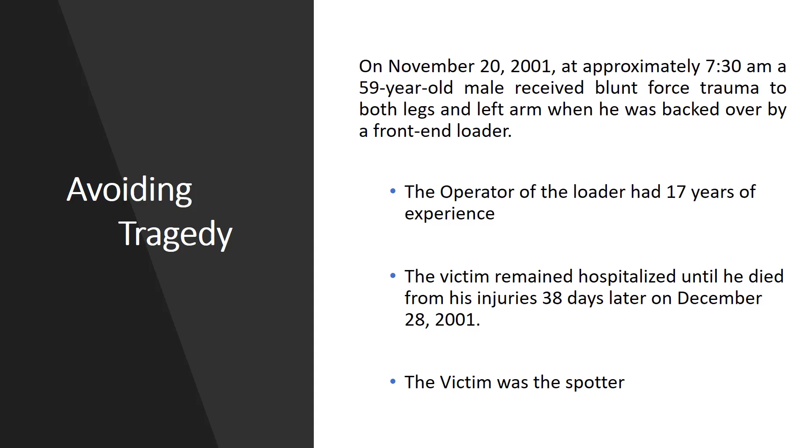The point of this slide is to ensure that the typical notion of assigning spotter duties to the newest or least experienced laborer is dangerous and irresponsible. Spotting equipment is a demeaning task? No, it's not. It's an important task that helps prevent accidents and fatalities. Spotters must be experienced and knowledgeable in order to maintain a safe working environment.

What is a spotter? Someone trained to monitor mobile equipment movement and maintain immediate lines of communication with the equipment operator. Possesses knowledge and experience with construction and/or the area. Understands typical hazards of specific construction mobile equipment and knows basic hand signals to both guide and communicate with the mobile equipment operators.

Where to use spotters? Spotters are required for the protection of workers, materials, structures, and equipment when a driver or operator does not have a full view of the intended path of travel. An operator is moving in an area where other workers and/or personnel are in the immediate vicinity. Maneuvering with limited visibility or space. In high traffic areas. Operating near overhead power lines. And when physical hazards are present.

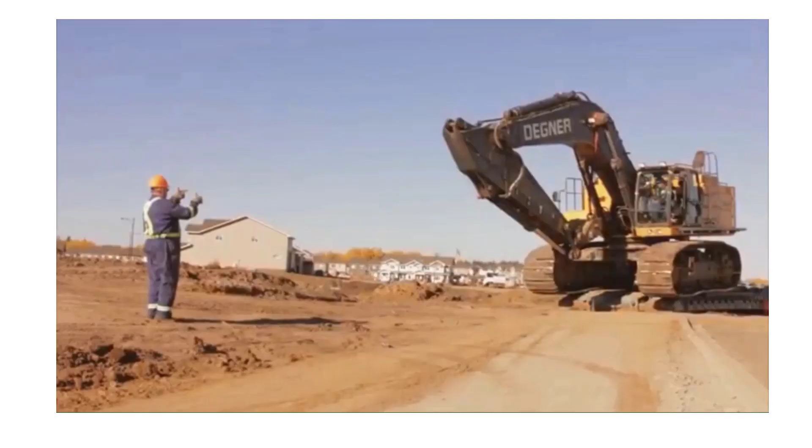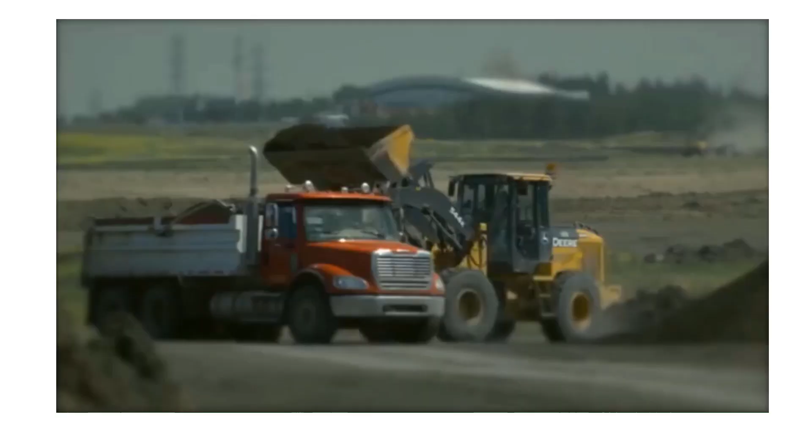So we have an understanding that the use of spotters is advantageous to the safe execution of work with heavy equipment. Are they used at all times? Not necessarily. But here are some common scenarios encountered on construction sites when spotters should be used. Spotters should be utilized when navigating with materials, working in tight or congested areas to assist in monitoring the operator's blind spots, working around overhead utilities or structures, excavating around buried facilities, and on sites congested with heavy traffic and/or ground personnel. While every construction site will present different scenarios, it's important to recognize the site-specific hazards and identify when the use of a spotter will help eliminate or control those hazards.

Spotter responsibilities. They shall be uniquely identified, protect themselves, dedicated to the task and have no other duties. Only task is to spot the equipment moving, prevent and reduce the potential for accidents and injuries, stay constantly aware of surroundings and changing conditions, prevention of equipment contact with personnel, machinery, property, and other equipment, maintain clear, effective communication with the equipment operator and all personnel in the immediate area.

So does just having a spotter make things safe? No, not really. A spotter contributes to a safe work site only if they are properly trained and understand their function. They must recognize the equipment requirements and limitations and be able to give clear direction to operators. Not everyone can be an effective spotter, and recognizing some of the requirements needed is essential in selecting the right person to do the job.

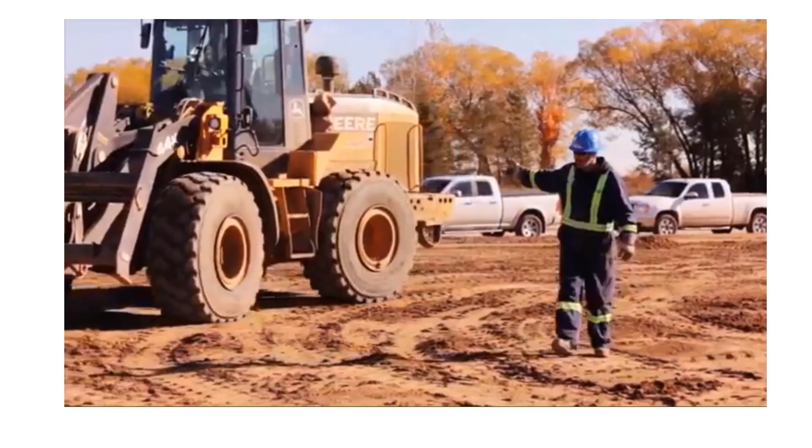A spotter needs to possess the following skills. Must have a strong understanding of the task, good vision and be able to judge distances with accuracy, clearly understand all communication protocols, including signals to be used to direct equipment operators, be fit for duty, including the strength and ability to stand for longer periods of time, and may need to be able to walk significant distances. They must remain diligent and alert in recognizing changing conditions and hazards.

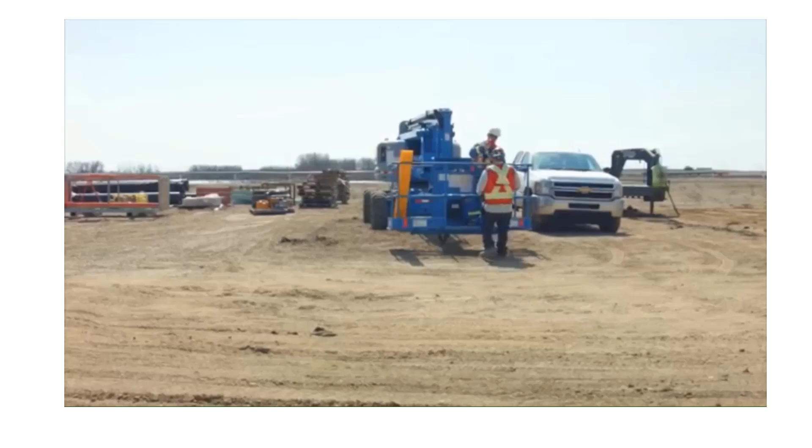Understand the need for and maintain the care and appropriate personal protective equipment needed for the job. Possess a responsible attitude in maintaining a safe work environment for themselves, the operator, and their worksite. Employers need to recognize these requirements, and workers tasked with spotting duties need to demonstrate these skills. The wrong person tasked to spot equipment can result in significant damage, injury, or even death.

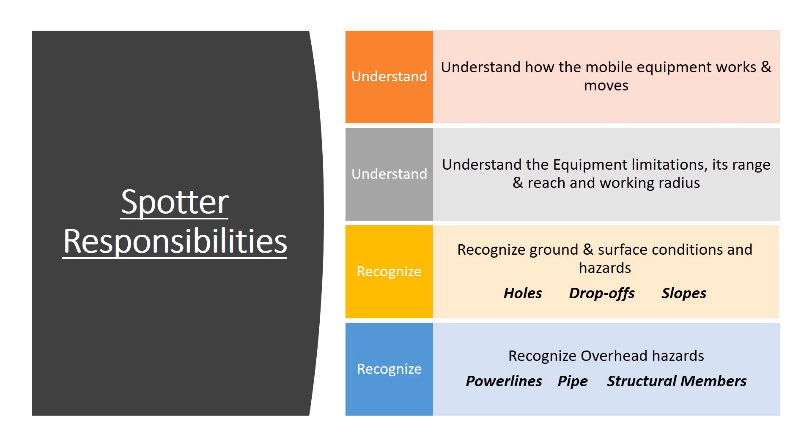Spotters must understand how the mobile equipment works and how it moves, understand the equipment limitations, its range, reach, and working radius, recognize ground and surface conditions and hazards such as holes, drop-offs, slopes, recognize overhead hazards such as pipelines, power lines, structural members.

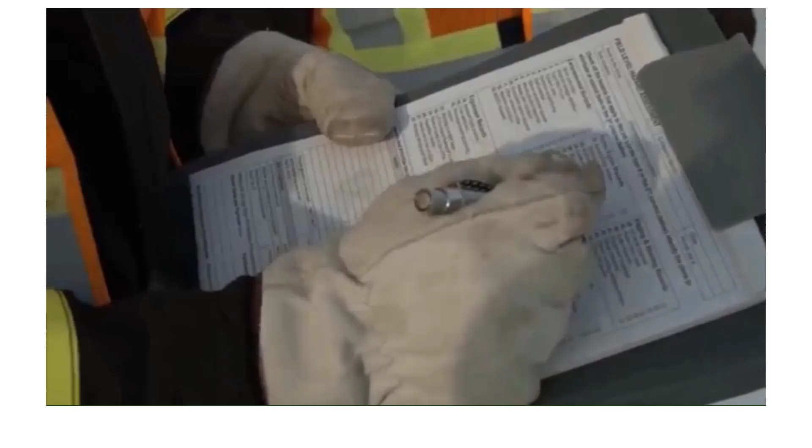We've identified the requirements and expectations needed of a suitable spotter. However, before any work can begin, a hazard assessment must be conducted. This process must include all personnel involved in the task at hand and is required to be reevaluated and updated as the task or day progresses. While every task and site will pose their own hazards, some general hazards to consider as it pertains to the spotter's role can be applicable in all operations.

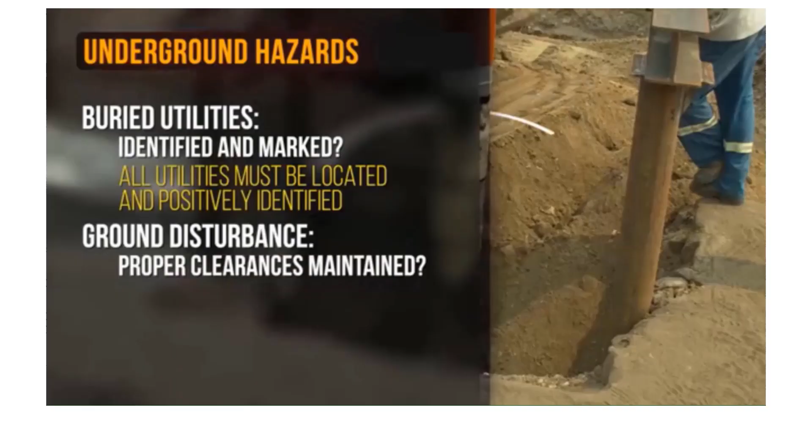Consider ground conditions. Is it smooth and dry, or is it slippery and uneven? Is there a slip or trip potential for the spotter? Do the ground conditions present a potential rollover concern for equipment? What about hazards above? Are there overhead power lines, structures, or work areas present where the spotter or equipment will be working? Are there buried utilities in the area, and have these been identified and marked? If spotting equipment during excavation work, all utilities must be located and positively identified. Are adequate ground disturbance clearances being maintained, and do you know what the clearances for mechanical excavation are?

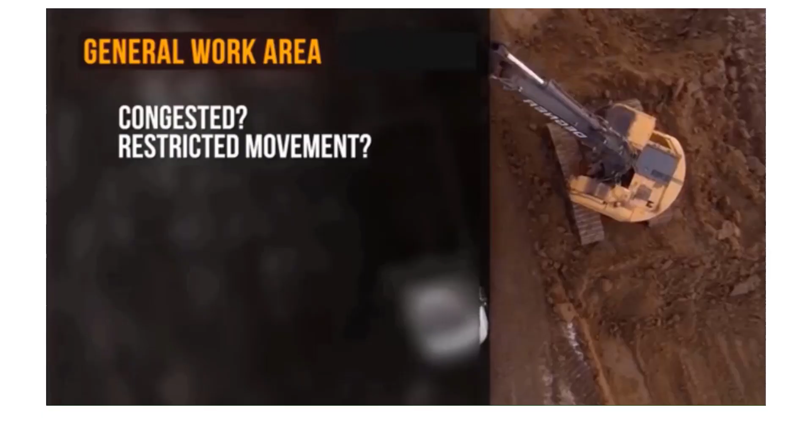Is the work area congested, or does it present restricted movement for the equipment? With pivoting equipment such as excavators, how much room does the equipment have to operate considering their swing radius? Are other workers in the area of the mobile equipment? What are the blind spots of the particular equipment, and what are the safe positions for the spotter to be to both direct the operator and stay clear of blind spots or pinch points? Is the spotter positioning safe in the event of operator error, mechanical failure, or equipment upset?

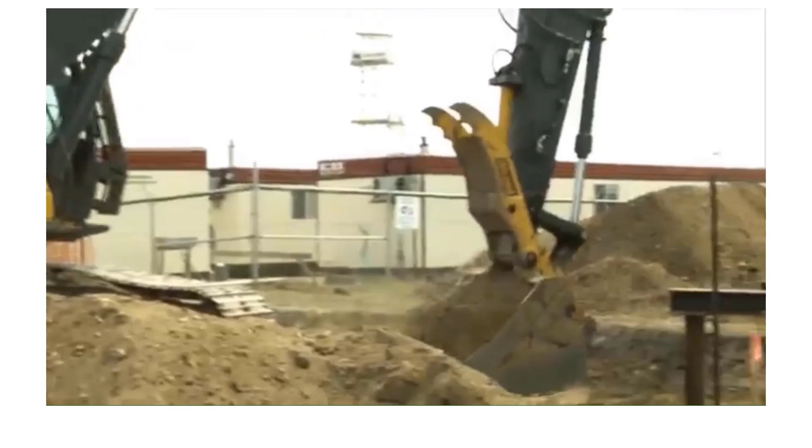Does everyone involved fully understand the communication protocols or signals to be used and the method of communication established? Are two-way radios to be used in combination with visual signals, or are the spotter and operator relying solely upon visual communication and signals? These are some of the most common and critical questions to consider when completing your hazard assessment. You will never control a hazard that you do not identify.

Blind spots and hazards. What is a blind spot? A blind spot is the area around a vehicle or piece of construction mobile equipment that is not visible to the operator, either by direct line of sight or indirectly by the use of internal and external mirrors. Equipment with enclosed cabs create large blind spots for the operator. The bigger the equipment, the larger the blind spots or hazardous areas for pedestrians and ground workers.

What are the hazards? Running over or striking pedestrians. Running over or striking site materials and tools. Striking other equipment or vehicles. Rollover on steep slopes. Contact with utilities and power lines.

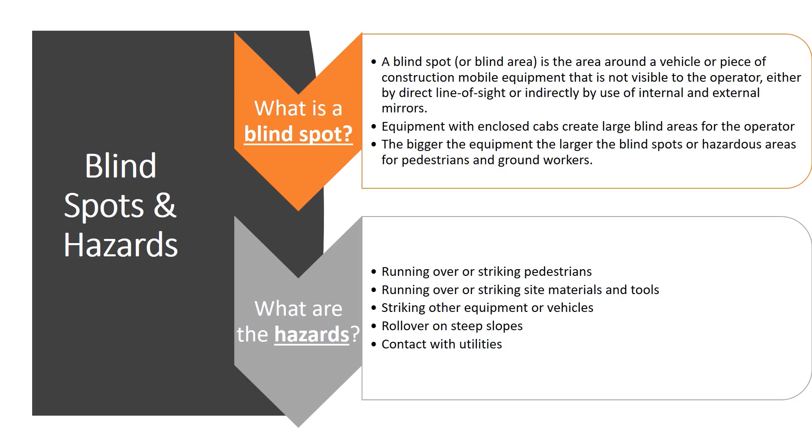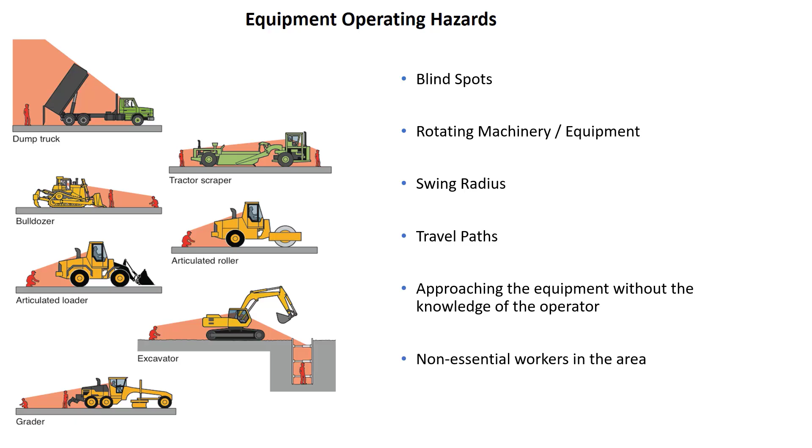Equipment operating hazards. This slide depicts several hazards when working around operating equipment. Remember, if you can touch it, you're too close. Stay out of blind spots. Stay away from rotating machinery outside of their swing radius or in their travel path. Never approach a piece of equipment without the knowledge of the operator, and make sure non-essential workers are out of the area.

It's possible that one of the most critical controls to consider after assessing the hazards begins with spotter positioning. By ensuring the spotter is clear of blind spots, in constant visual contact with the operator, and on the best ground conditions available, the hazards for personal harm to the spotter can be greatly reduced. This position must always provide a safe emergency route for the spotter in the event of equipment upset, mechanical failure, or operator error. It's also critical to ensure the spotter is clearly visible to the operator both in their line of sight and clearly identified with the use of a Class II high visibility vest and possibly arm gauntlets.

General positioning should always adhere to the following practices. Never stand directly in front of or directly behind any equipment. Always avoid pinch or crush points. When hoisting materials or equipment, never walk or stand underneath a load under any circumstance. Stay clear of equipment blind spots. If you can't see the operator, they can't see you.

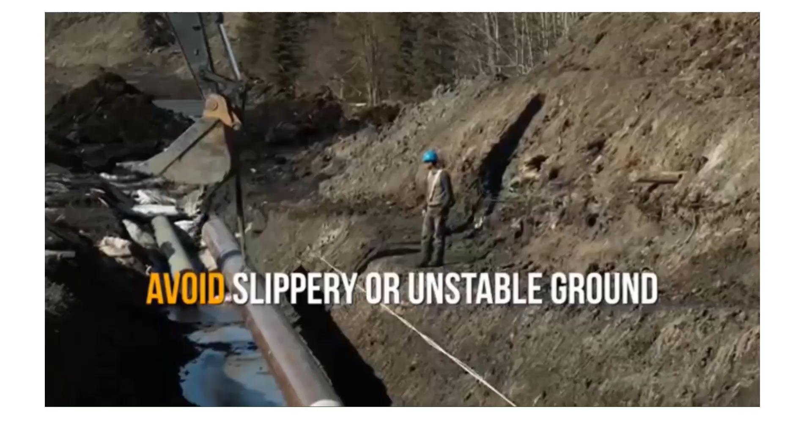Ensure footing is stable and don't stand in positions or on ground that possess slipping hazards or presents potential to collapse, such as at the edge of an excavation. When possible, position yourself in an area that minimizes movement. This reduces the likelihood of slips and trips and also helps the operator know where you are at all times. If an operator ever loses sight of the spotter, they must immediately cease operation and re-establish line of sight with the spotter.

Operator responsibilities. Ensure the spotter understands the equipment travel path and the hazards. Maintain clear, effective communication with the designated spotter. Do not move without the attention of the spotter. Immediately cease all movements if the spotter isn't visible. Stop if you cannot see the spotter. Ensure the spotter understands maneuvering limitations of the equipment. Stay constantly aware of surroundings and changing conditions. Prevent equipment contact with personnel, machinery, property, and other equipment.

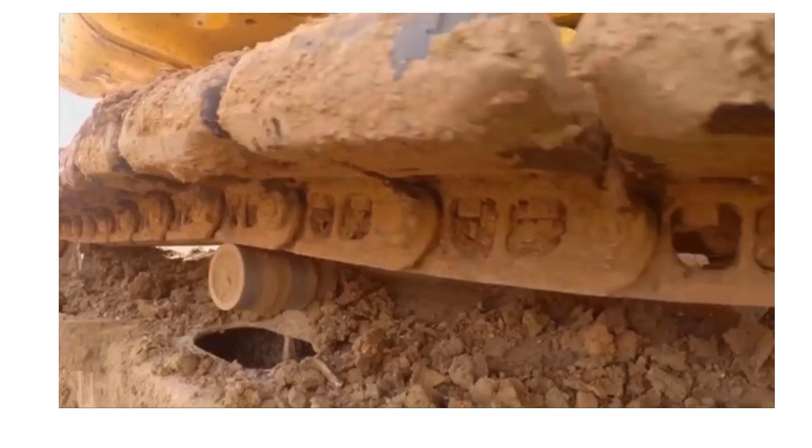We've spent a lot of time discussing the spotter, their requirements, and the need to communicate well with operators. But safe spotting operations also require a lot from the operator. In order for an operator to work safely with the spotter, they need to follow some guidelines as well. While mandatory in all situations, operators need to ensure mirrors, windows, and visual aids such as backup cameras are clean and clear of dirt, mud, and in cold weather, defrosted.

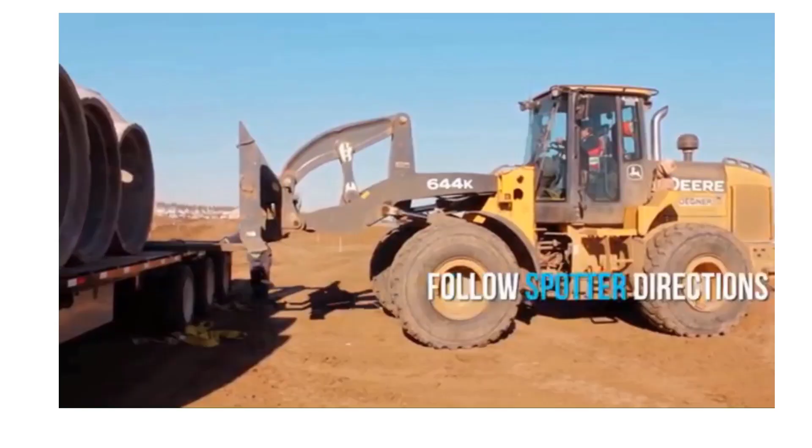They need to follow the spotter's direction and ensure the spotter is in the correct location to monitor active blind spots at all times. If communication, signals, or directions are unclear, it is the operator's responsibility to stop the equipment to clarify or reassess the situation. They must not operate the equipment independently or disregard their spotter. If they are to lose visual contact with their spotter, they are required to stop operations and re-establish visual contact. Operators must always operate their equipment at a safe and appropriate speed, regardless of whether or not they are working with a spotter.

Operator and spotter responsibilities. Understand the task. The operator and spotter will discuss, understand, and agree what the operator is doing, where they're going, the route, where the spotter will be located, signals to be used, and emergency stop communications: air horns, whistles, etc. When operating equipment, maintain communication until the task is completed.

While moving a semi-truck trailer combination using a spotter, the driver temporarily stopped to pick up items that had fallen to the floor of the vehicle. The spotter assumed that the driver had made a final stop and parked the vehicle. He crawled beneath the vehicle to uncouple the trailer and the truck hoses. The driver sat back up, did not see the spotter, and pulled the vehicle forward over the spotter, resulting in a fatality. Never assume that using a spotter makes the situation safe.

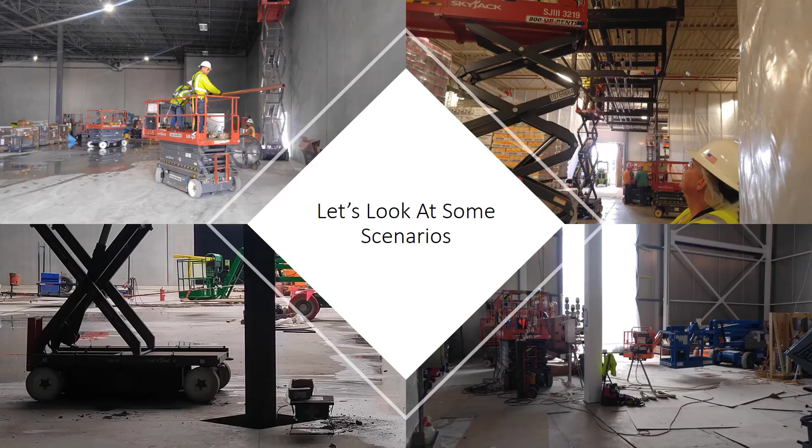While two-way radios provide an effective method of communication, they may not always be available, which emphasizes the fact that the spotter and operator must always maintain visual contact with one another. This stands true even when two-way radios are being used. All signals to be used must be clearly understood by the operator, spotter, and the personnel on the construction site. Let's look at some scenarios requiring spotters.

Do you think a spotter should be required in this area? What hazards do you see? What are some possible incidents? Spotters should be used in this area. Several pieces of equipment, scissor lifts and aerial lifts are working in the same area. Incidents include contact between equipment, caught-by and struck-by hazards for personnel when equipment is moving or rotating, and contact with other materials.

Do you think spotters should be required in this area? What hazards do you see? What are some possible incidents? Spotters could be used if another craft moves in. These lifts all belong to the same company working in the pipe rack, and they are separated. This is also a manufacturing plant. You can see the product in the area. If plant personnel enter the area with forklifts, spotters are needed to ensure safe distances between equipment is maintained and our client's personnel.

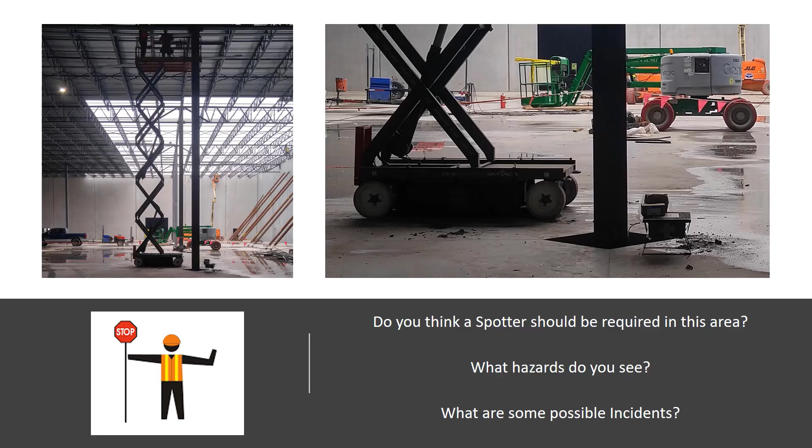Do you think a spotter should be required in this area? Yes. If forklifts or other equipment are in the area, spotters shall be used. Do you think a spotter should be required in this area? Absolutely. These covers are inadequate to support construction equipment. A spotter should be used if the equipment must be operated in close proximity to these hole covers.

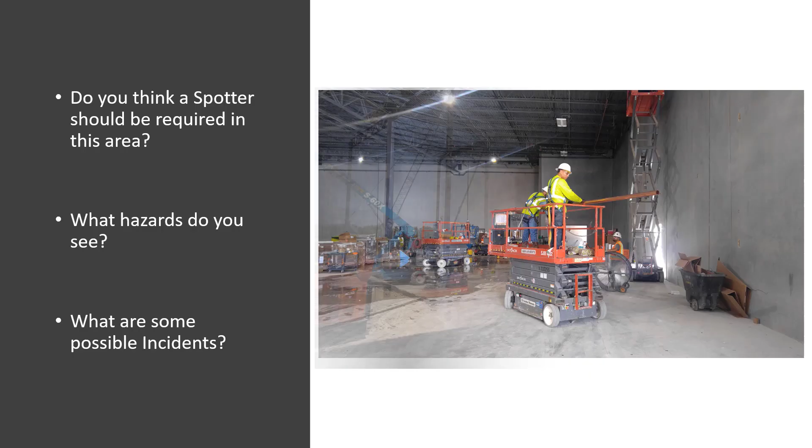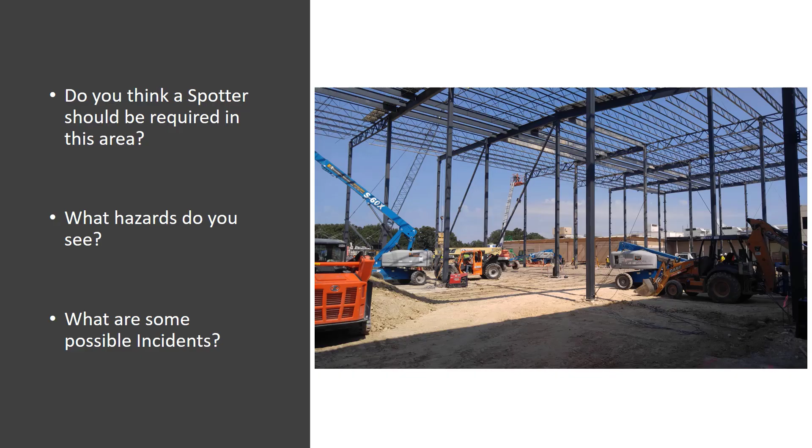Do you think a spotter should be required in this area? Absolutely. Spotters are needed for this work area. There are several pieces of active equipment in the area, and contact between equipment or personnel is likely without the use of spotters.

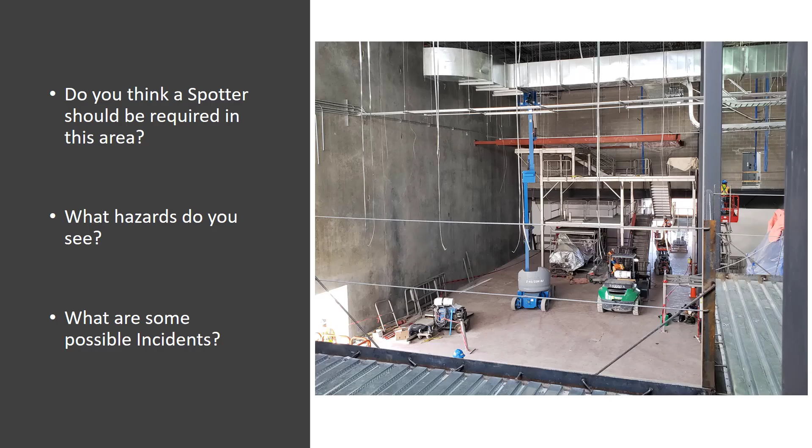Do you think a spotter should be required in this area? Not necessarily. The forklift operator has a full view of the elevated lift. A spotter would generally not be needed unless the conditions change. Do you think a spotter should be required in this area? Not necessarily. The forklift operator has full view of the elevated lift. The spotter generally would not be needed unless conditions change.

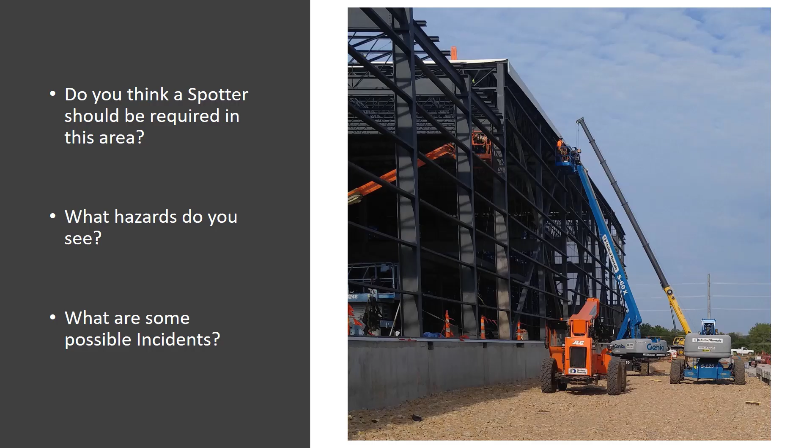Do you think a spotter should be required in this area? Absolutely. This work area should be barricaded off and no personnel in the area of the lift base. Also, what is on the backside of the aerial lift? A scissor lift. Two pieces of equipment in close proximity is never a good option.

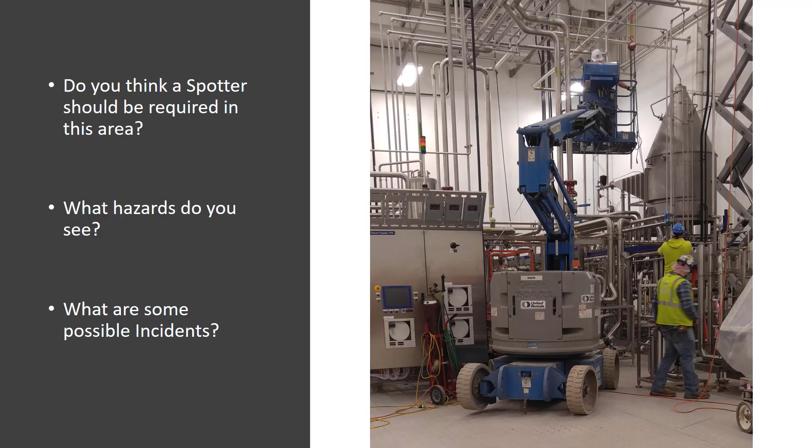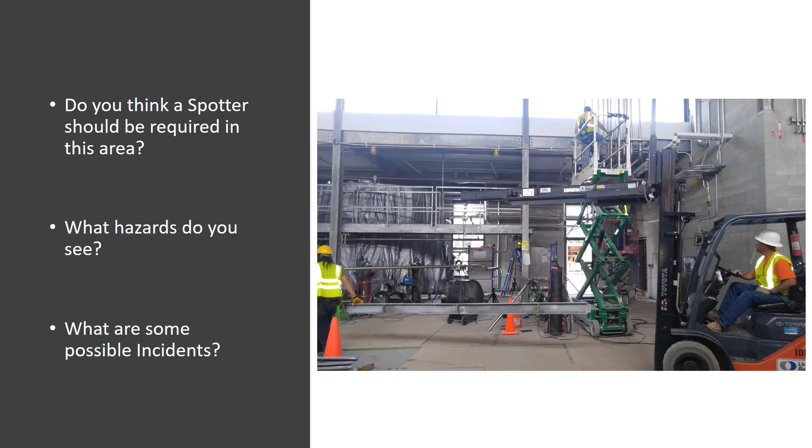Do you think a spotter should be required in this area? Absolutely. A spotter is required for this operation. Also, the scissor lift should be repositioned parallel with the mezzanine to allow more room for the forklift and reduce possible contact. Do you think a spotter is required for this area? Absolutely. A spotter is required for maneuvering this lift into place.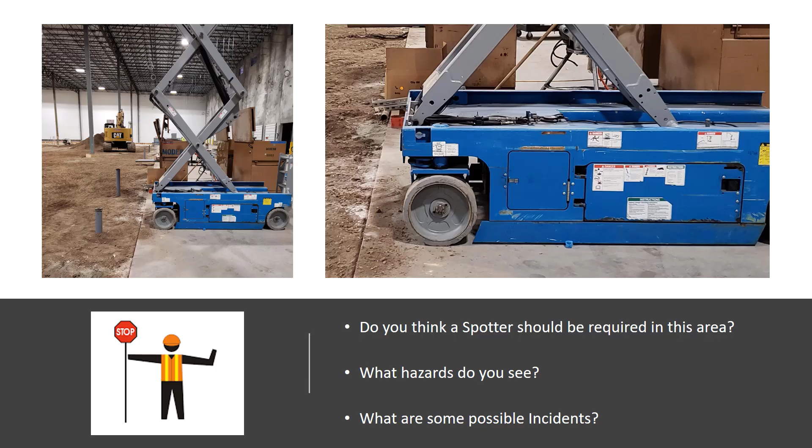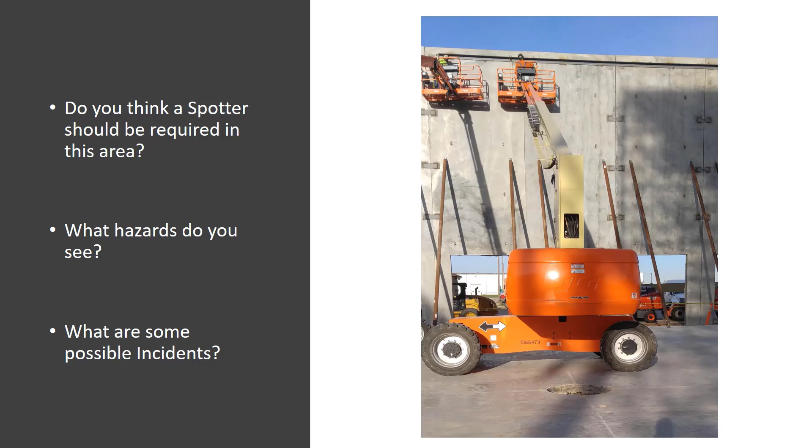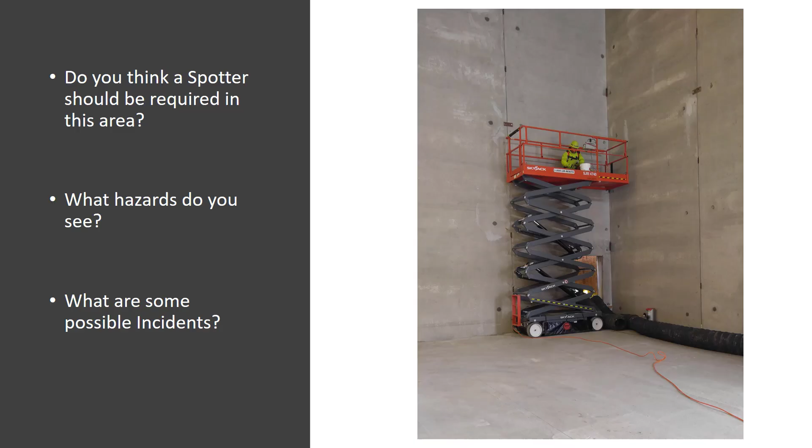Do you think a spotter should be required in this area? Yes. There are no hole covers or indicators that a hole exists. A spotter should be used when moving the aerial lift. Effective communication between the lift operators is essential. Would a spotter be required in this area? No. No spotter is required in this situation. However, the situation must be reevaluated if other equipment and personnel move into the area.

Do you think a spotter should be required in this area? And what procedure should you use to move the lift? Yes, a spotter is required. Equipment is in close proximity to each other, and a spotter is necessary to coordinate the movement. Notice the positioning of the equipment. Contact is likely. How would you coordinate equipment movement? The elevated scissor lift should be completely lowered before the boom lift performs any movement.

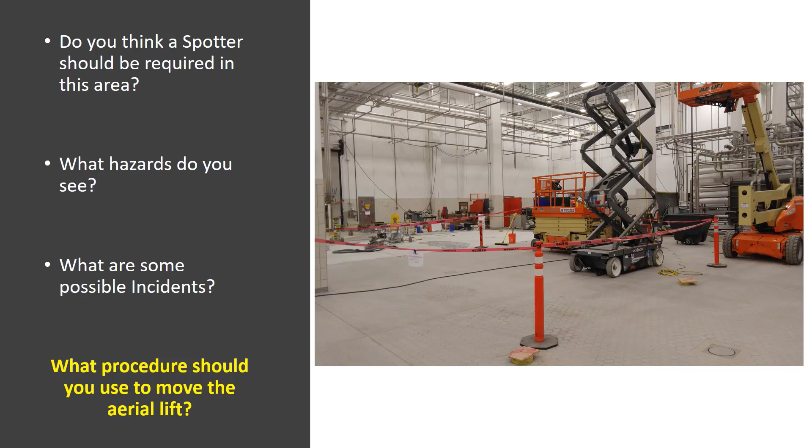In this scenario, no spotter is required. The personnel door is barricaded. The lift is stationary and barricaded to prevent unauthorized access into the work area. No spotter is required. In this scenario, a spotter is required. There's multiple pieces of equipment and multiple trades all working in close proximity. Spotters shall coordinate all equipment movement, and each contractor needs to coordinate their movements with the other.

Final thoughts. Mobile equipment operators and spotters hold equal responsibility when moving equipment in the work area. Plan the work, assess the hazards, understand the task. Do not assume having a spotter makes the situation safe. This creates a false sense of security. Designate only one person to give signals, except when signaling an emergency stop. Coordination and communication between the spotter and the operator are critical.

If there is a change or deviation from the plan, give the stop signal and reevaluate the risk assessment and the precautions to be taken. If the operator stops responding to signals, the task is shut down until the issue is resolved.

We appreciate your attention to this program. Spotters have an important role and must be taken seriously. Please contact your supervisor if you have any questions. And always remember, if you have to choose, choose safe.